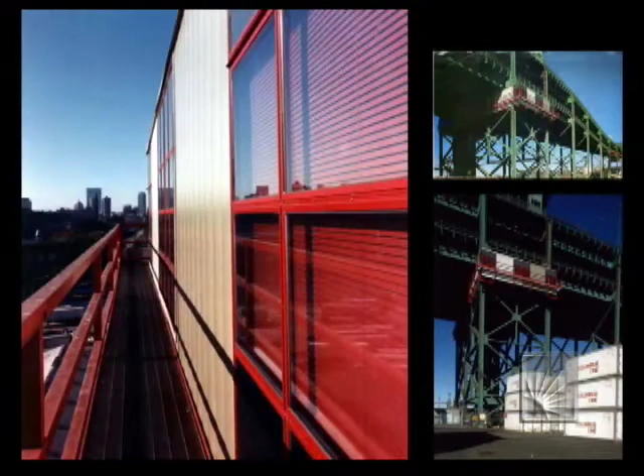This first project is the Massport Tobin Bridge Administration Building. It's hung underneath the largest bridge in New England. I promised some of the engineering students we'd talk a little bit about engineering.

It's slung under that structure and receives a great deal of salting. And salting is corrosive. So part of the project was to make a new container for the building.

While at the same time letting the operators who take all the money from the tolls operate 24 hours a day, inside there was a kind of student body left, student body right approach to reorganizing and redoing the interior, while the exterior was reclad also.

And then an operation control center for the MBTA, where all of the subway lines that are underground in Boston are operated from. This was a 5-story building. We went up 5 stories vertically, making a new 10-story building, and created a new state-of-the-art control center for that transportation facility.

But moving to the recent projects in campus settings, a pair of projects that talk about wrapping. One at the University of Pennsylvania chiller plant, and the other, the University of Cincinnati University Pavilion.

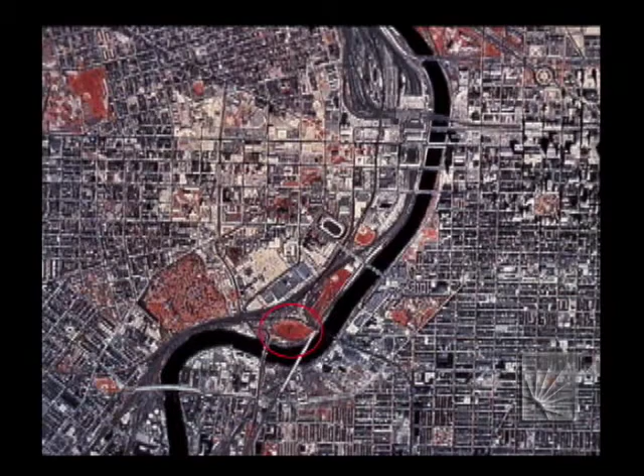The Penn is a campus infrastructure project at the edge of the river, isolated from the campus by a railroad track. This project was done by competition for the architecture students. There was an invited competition, and we were fortunate enough to be selected, and the brief was to maximize the available site for recreation and sports, and to maximize the interior of the chiller plant for those functions. So two needs to maximize on one limited site.

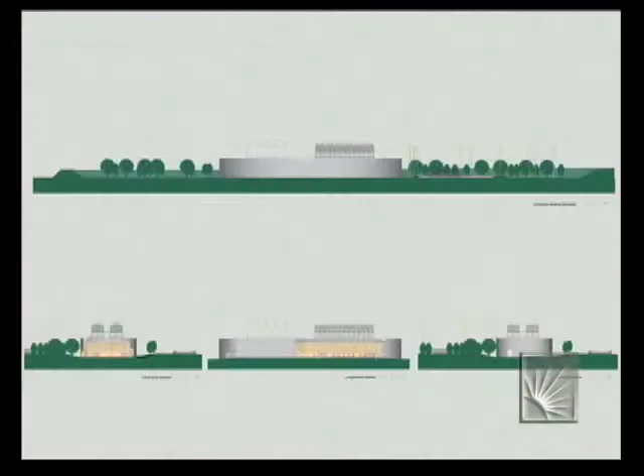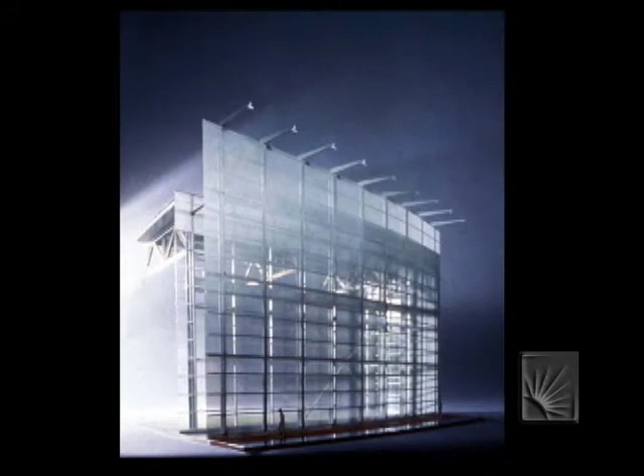These are the competition boards. This is a physical model photographed on the roof of our building and digitally inserted into a grassy field. This is a model made in our office that explored the connection between the outer skin wall, which is a free floating element that surrounds an interior rectangular building.

Here is the location in Western Philly, to the south of the University of Pennsylvania campus. You can see the roadways and the highway. The left bridge comes in from the airport. This direction is called University Bridge, which means that this building is a gateway to the campus. It identifies it's the first building that you see as you approach the Penn campus from the airport.

It's also their varsity baseball field. The goal was to move the varsity here because they had all the equipment. They could get here easily because they have the buses and vans to take them, and to let the other ball field be used by students on campus. So an important move.

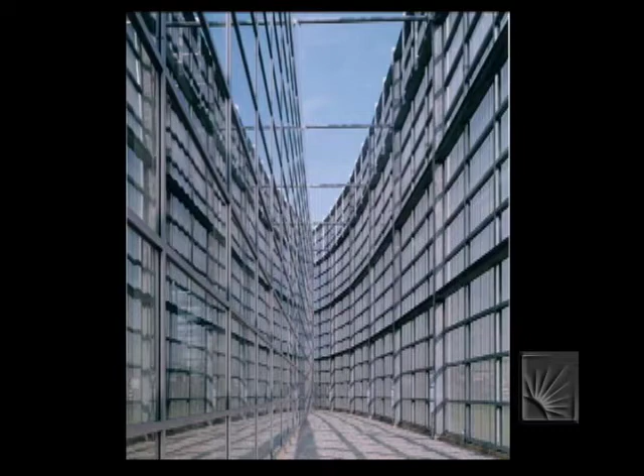And what we have, I mentioned the interior glazed rectangular building, which we're seeing on the left, and the elliptical screen wall, which is silvery and reflective in the daytime, but almost transparent at night, with its own foundation and the development of a new material. And the engineering students will notice the tie pin connections at the top that restrain the wall from wind loading deformation.

So we developed with manufacturers the idea of a corrugated stainless steel sheet that was perforated so that we could see through it. So the screen wall creates a precinct where the infrastructure is contained and all the trucks in it are contained, and the recreation can occur on the outside. And this was much stronger than the equivalent perforated corrugated aluminum.

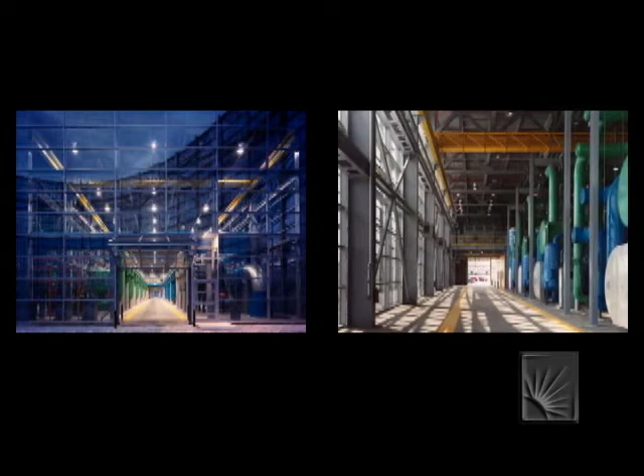So here is the glazed rectangle, which vehicles travel through. They come to the end and they can turn around and go through the other path. So large trucks can circulate through the plant and then leave again without getting out onto the ball field or the other recreational areas.

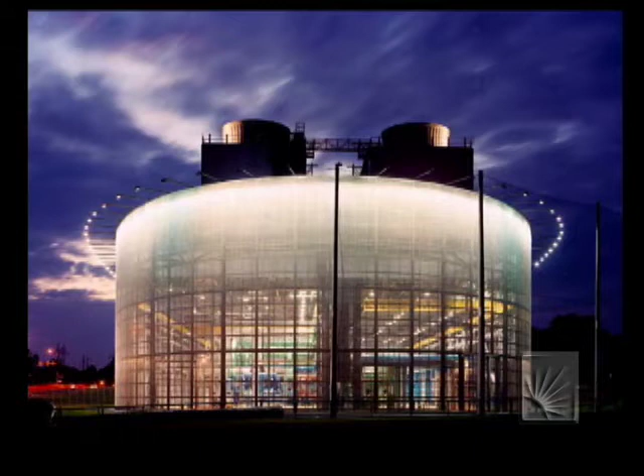Color-coded, and at night revealing the innards of the plant to the traffic, high amounts of traffic that circulate around the building. And with a glowing lighting from the top of these 60-foot tall screen walls.

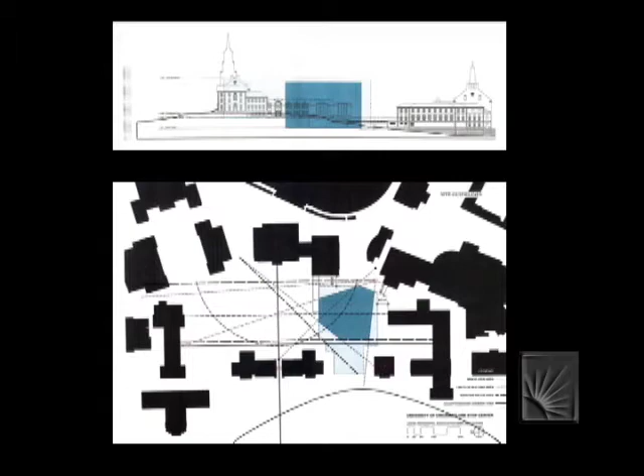So we look at the volume and mass that's appropriate. And this is a small model that shows the reconfiguration of what was a ravine into a continuation of the main campus landscape area, the campus quad. And the idea of the building was a window on the campus, a window on this quad.

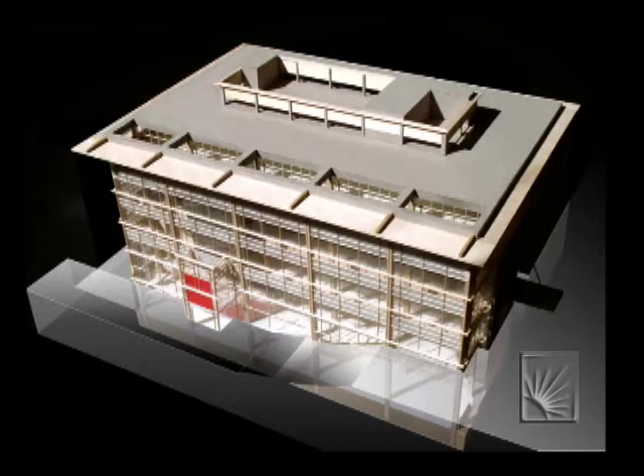And then the building as developed, and the horizontal lines on the window of the campus that we see that are lighter colored are a ceramic frit on the glass. Again, for our chemistry students, the ceramic frit is integral then with the glass because it's applied at very high temperatures. And it provides some screening from the sun.

So we have a very narrow atrium space along the whole edge of the building that looks out onto the campus main space. And as a student space and visitor center, it's very important to be able to get oriented. And we were conscious of the proportions of the other buildings and the heights and the need to be an ensemble player on the campus.

And the entries are identified with a large canopy and red opening, red metal. There's an open loggia at the top above the atrium space to the left. It's about 16 feet wide for the architecture students, that atrium.

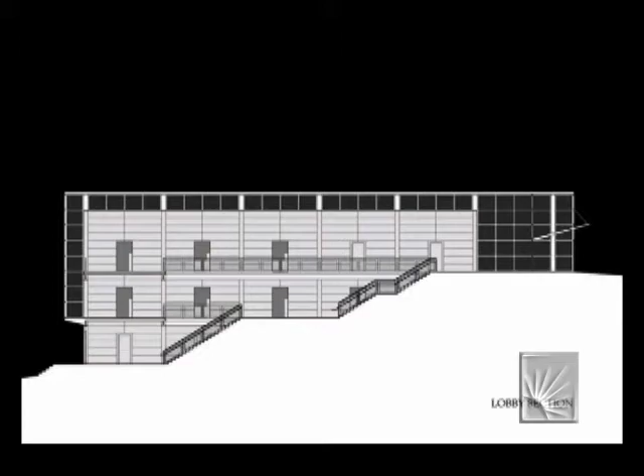And here's entering from the top and looking through the site and moving through, in this case, a 14-foot wide space, down throughout the building, but always with a luminous sense of the outdoors, which is very important for this campus.

And then the stage, which is for dance, theater, and music. So it was constructed with a small front area and aisle so that the back area could be darkened for small music performances. This school doesn't always have a big audience, and so being able to accommodate small groups and large groups comfortably was part of the brief.

And at the Smith College Fitness Center, we inserted between two existing recreational buildings a small fitness center located on campus, and again, this is along the river. And the direction towards the main campus is up towards the top of this image.

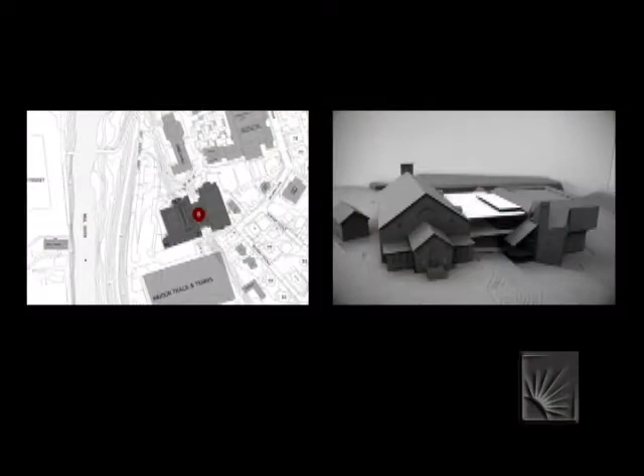So here is the B scheme, which was located in between a 70s gymnasium on the right and an 1880s gym on the left. And we used some of the existing building as perches for fitness equipment and allowed skylights to bring light in down deep below.

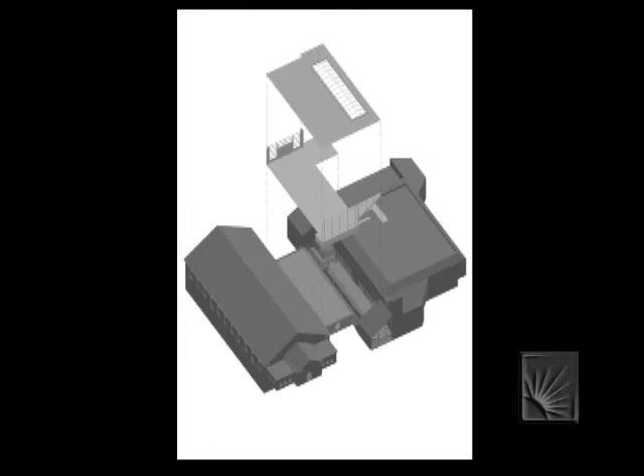This not only solves circulation issues between the two buildings, making them handicapped accessible, but this film of glass stretched between the masonry objects gives high visibility to this very, very small program, which was important on campus. So here you can see some of the old and some of the new, and a spatial connection vertically and to the light.

And the final group of our projects, 3 projects at the same institution, dealing with the idea of fitting, closely fitting. These are the Harvard Science Center on the left, the Harvard Library Services Building, which is not a public library. This is where they repair all of the important historic books on campus, so it's a support space to all the many libraries on campus. But it does have a public function at the ground floor.

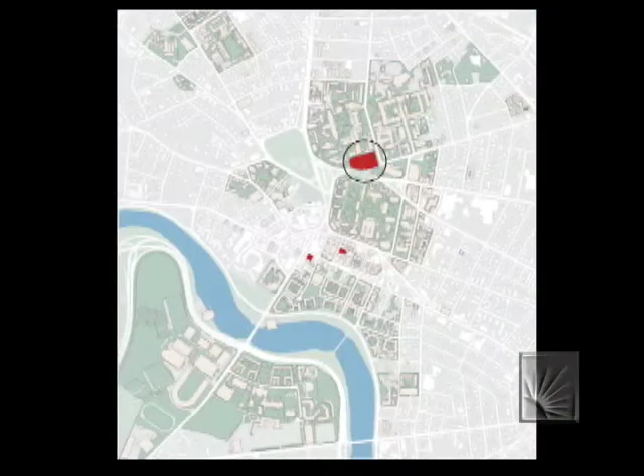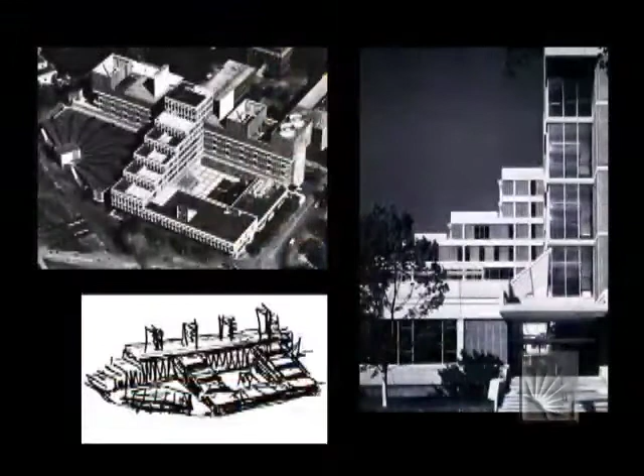This is the location of the Harvard Science Center, which was an addition and expansion to the Department of History of Science, to Jose Luis Sert's building. This is a landmark modern building, Jose Luis Sert's Harvard Science Center, and it's a humbling experience to be asked to expand this very special building.

We did this with three compact objects of translucent channel glass in dialogue with the existing precast structure and clear glass of the building. You can see certain sketches which were a little bit different than what was actually built. In the lower sketch there's more mass than in the photo above, and we used those sketches to have a dialogue posthumously with Sert about what would be appropriate in terms of expanding this building.

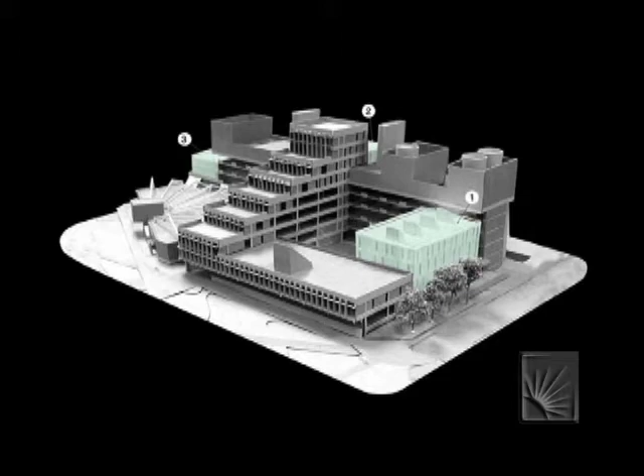We created these three compact objects, and here you see them in a model: a large one on the right, a medium one on the left, and a very small one at the top. And here is the context—you can see the addition with the existing, cheek to jowl with Memorial Hall, and the Sert precast on both the right and the left, with the new insertion fairly clear.

We needed to meet the energy requirements for the building, and so the channel glass is filled with insulation made out of tiny straws that's compacted into a block. The full height of the channel glass is filled with this block of insulation, and then the channel glass, one piece fits into the other around that insulation and is sealed. We also have clear glass to view out of.

There are offices at the top, so we have more glazing up at that level. Then there are seminar rooms at the middle area, so we have fewer. And down at the lower level it's highly glazed as a welcome into the historic instrument collection. There's a somewhat syncopated rhythm to the addition, and the proportions of the glazing are similar to Sert's—so it's a dialogue or ensemble playing between two architects at two different times.

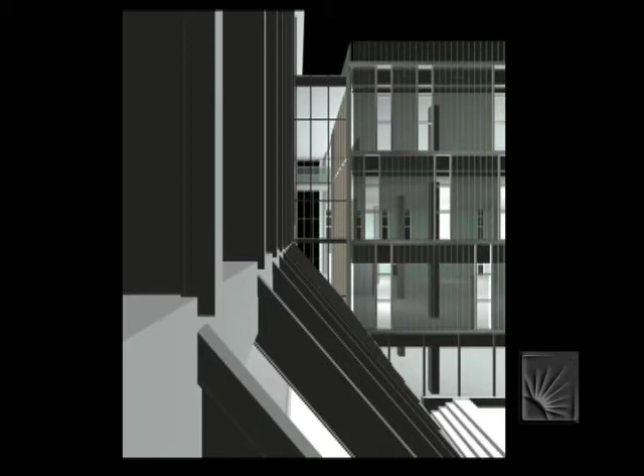We used computer drawings along with those physical models that I showed earlier. Some of the meetings of this glass and steel and concrete had to be quite precise, so the fitting was important physically as well.

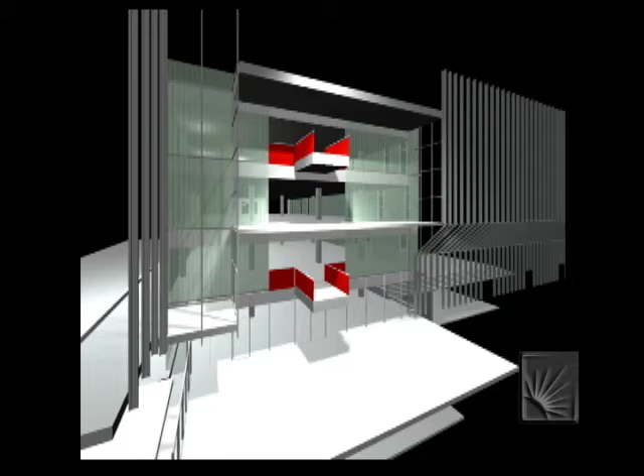There's a courtyard with a cafe—we're looking towards the other side of the historic instruments exhibit area, and from the street side. More computer images looking at one of the spaces that extends vertically through the building, and then being in that space.

Thinking about the corridor and the rhythm within the building as well as outside the building, making it commodious.

Moving on to the next one, the Library Sciences building, which is in a retail area, whereas the first project, the Lluís Sert project, was right across from the GSD in the very heart of the academic community. Now we're moving to the retail life.

To do this, we looked at the streetscape, the rhythm of the existing buildings, both in plan and in elevation. Our site is the little green box and the little white building below.

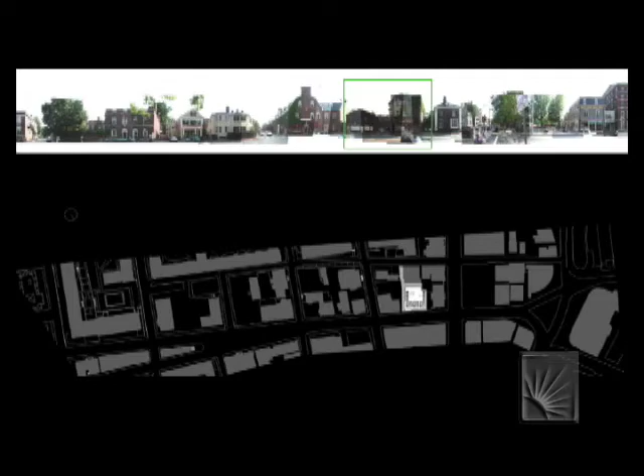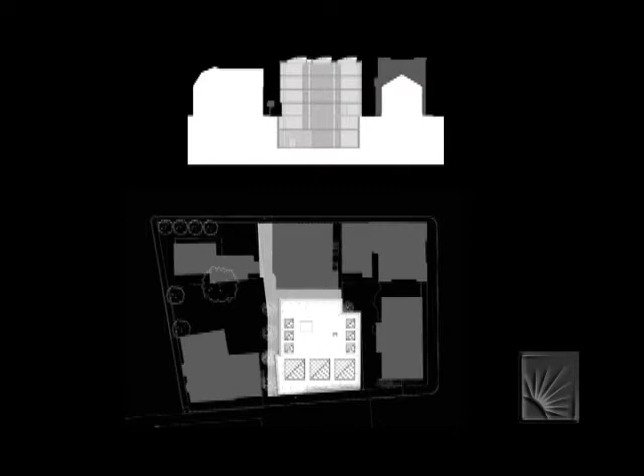We looked at maximizing the volume needed for the use while minimizing the volume experienced from the street. This meant we went down deep in the ground, and in this case we had geothermal wells to reduce the equipment load on the roof so we wouldn't have noise or a view up there, as well as geothermal wells for heating and cooling. So this is a gold LEED building.

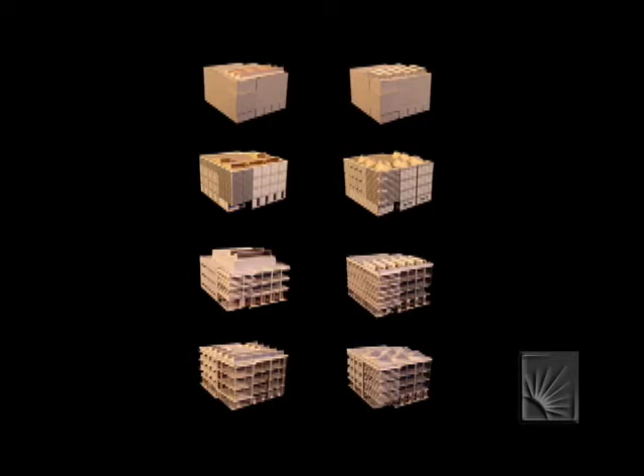Models were used extensively to look at that scale with respect to the neighborhood and the street, and then how it fit into the immediate streetscape.

Here is the building with skylights for the conservancy on the top floor, but no rooftop equipment.

From the lower level, with a retail bookstore at the ground level, a passageway through—which Cambridge is full of these little passageways—was restored and used as a way to view out of the building.

You can see the intimacy with the related buildings nearby, the brick building on the other side of the glass, and the conservancy area with the north skylights and north wall of glass.

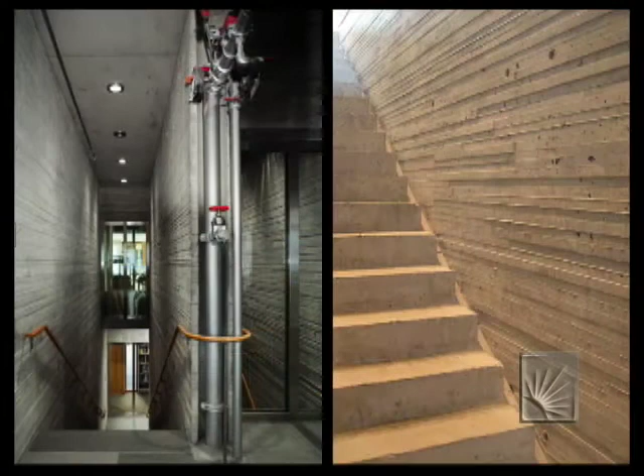What we heard was that this was the most beautiful fire stair, from an architectural jury. So I included it. For those engineers, that's all those standpipes you need for the water and fire suppression systems. This is concrete with a wood board pattern, achieving that texture.

And from the outside, it's all visible on the retail side. And lastly...

The Hasty Pudding Theater. This building was built in 1888 by Peabody and Stearns. The Hasty Pudding was an undergraduate theater and social club, and Presidents Teddy and Franklin Roosevelt were members. JFK was a member, also Alan J. Lerner, Jack Lemmon.

This was a place on the Harvard campus to let off steam, and they did. This is also the venue for the Man and Woman of the Year. At the time when Harvard did not have women students, the guys took over that role as well, so there was a lot of hijinks as part of this theatrical life.

The idea was to make a complete new, important theater for the campus, for undergraduates, and to retain the front social rooms. So we see the existing social rooms, and behind it, a large theater.

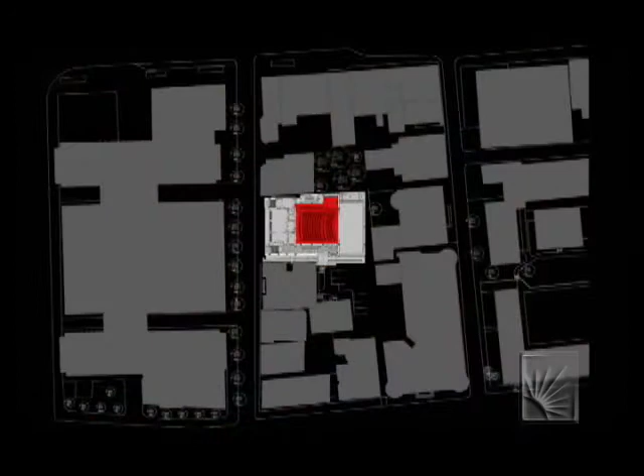We're looking again at fitting into a very dense urban site with a kind of jewel box of a theater inside. And this was the parti for that theater.

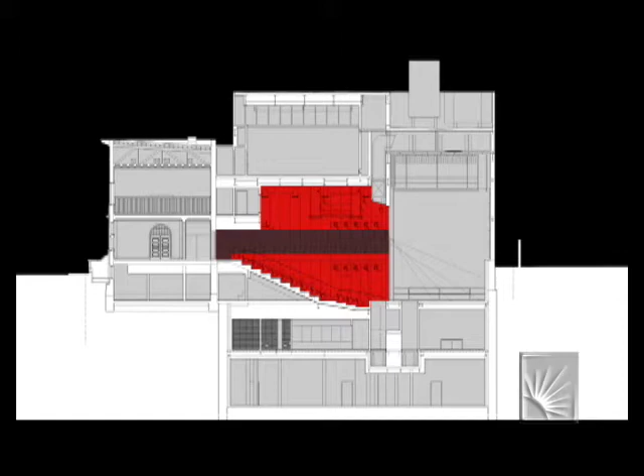The eventual skyline of the new and the old, the projection of the new in the back alley, the location of the theater embedded within the section—again going deep, deep, deep in the ground with slurry wall construction, and the engineering students, if you don't know about that you can ask me afterwards—to provide a wonderful new theater.

So a wonderful red box with the full stage accoutrement to make a wonderful new theater.

And the kind of fitting and collision of old and new in a dialogue with the main entry approach, either up the stairs or up the ramp beyond.

A kind of play barn with a zinc material in the back, and then, of course, the pointed brick in the front.

So returning to our metaphor, made to measure, I find it an intriguing way to think about architecture, and I believe it conveys a set of intentions which aptly characterize our work: made to fit a particular purpose and set of conditions, made with style, skill, precision, and made to last. At least that's our goal.